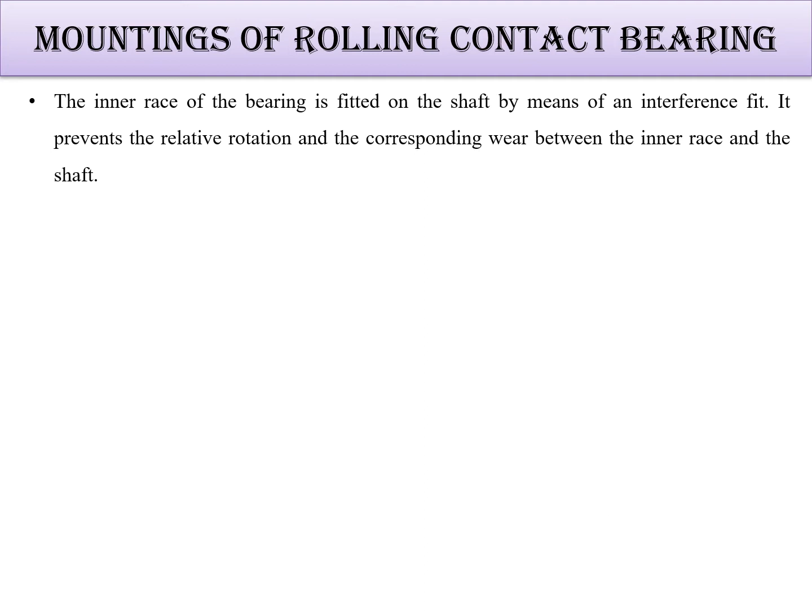So the next topic is the mounting of rolling contact bearings. Let's see the mounting, how to mount the bearing on the shaft. This is also a very important part. The inner race of the bearing is fitted on the shaft by means of an interference fit. Press fit or interference fit is used mostly here.

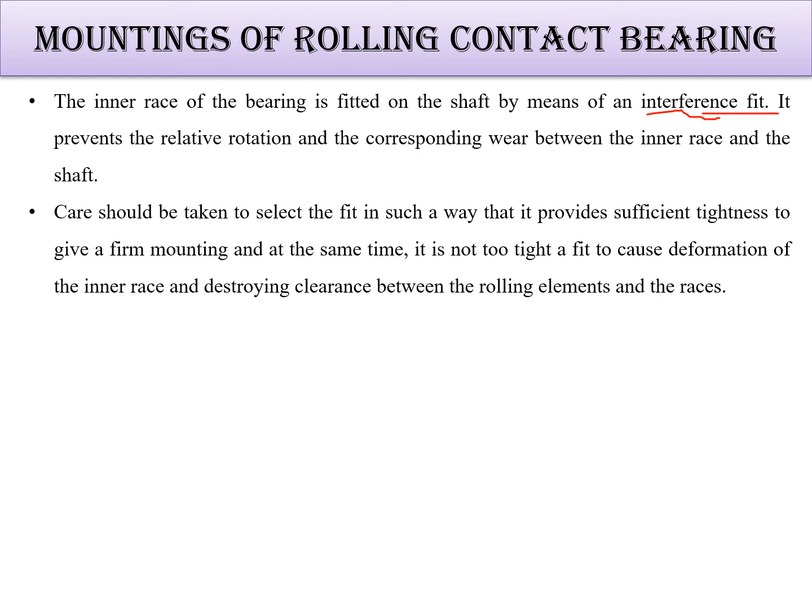It prevents the relative rotation and the corresponding wear between the inner race and the shaft. So care should be taken to select the fit in such a way that it provides sufficient tightness. It should be firm, it should be tight properly. No deformation should be there in the inner race.

The outer race is also mounted on the housing, in general with an interference fit, but with a lesser degree of tightness than that of the inner race.

Insufficient tightness will give you creep, a slow rotation of the outer race relative to its seating. This will not give a proper arrangement and proper working of the bearing. So the fitting should be proper. The outer race is permitted to shift axially to take care of axial deflection of the shaft also.

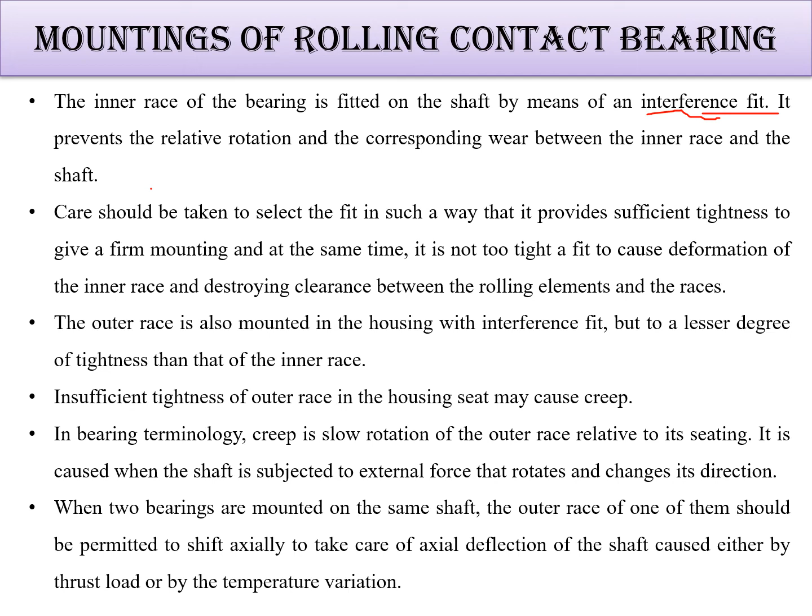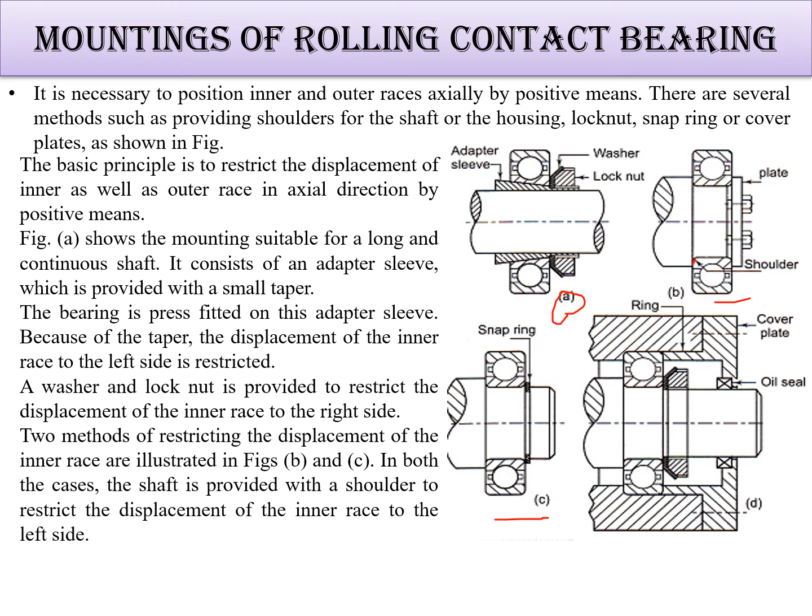Two methods of restricting the displacement of the inner race are illustrated in B and C. This is B and this is C. In both cases the shaft is provided with a shoulder, which restricts the displacement. And in D a shoulder is provided to restrict displacement of the outer race. You can see the lock nut and washers, and these oil seals are provided here. A circular ring of the cover plate restricts the displacement.

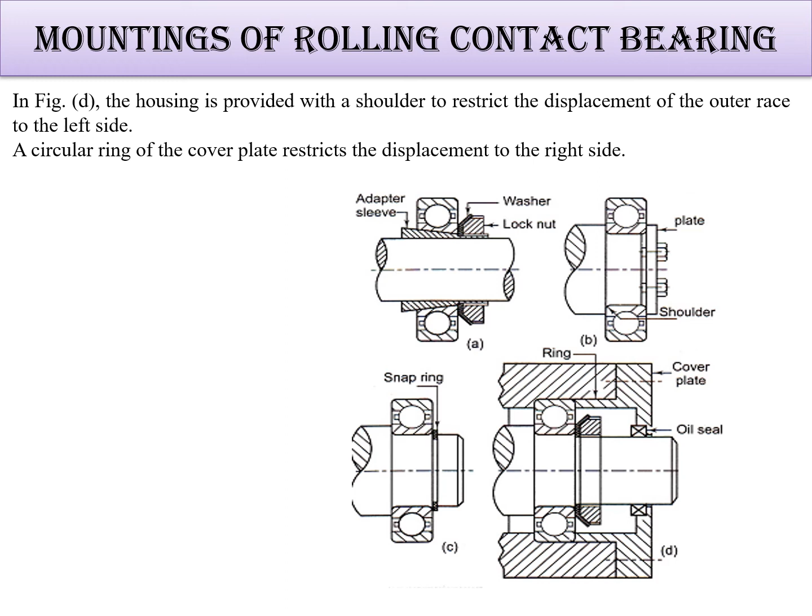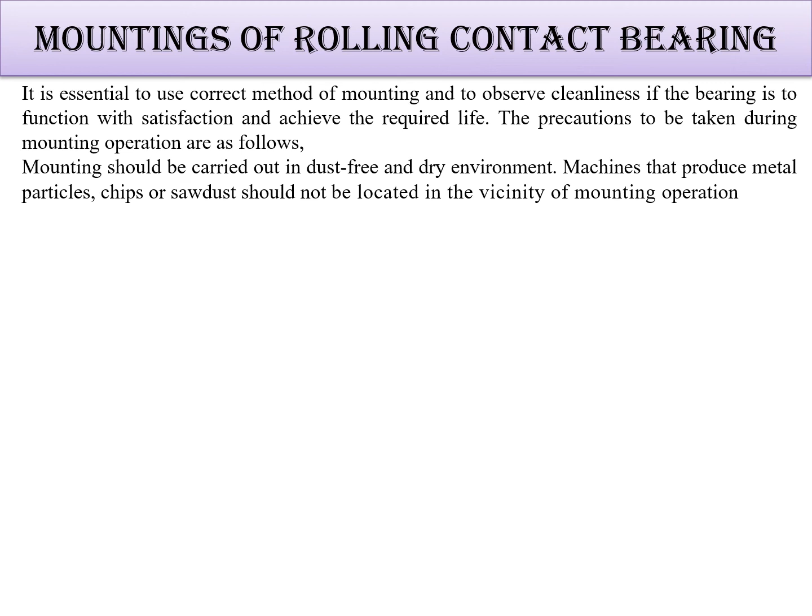It is essential to use the correct method of mounting and to observe cleanliness of the bearing. The mounting should be carried out in a dust-free and dry environment only. Before assembly, the shaft and the housing bore should be inspected; they should not have any dirt. And the bearing should not be taken out of its package until it is assembled.

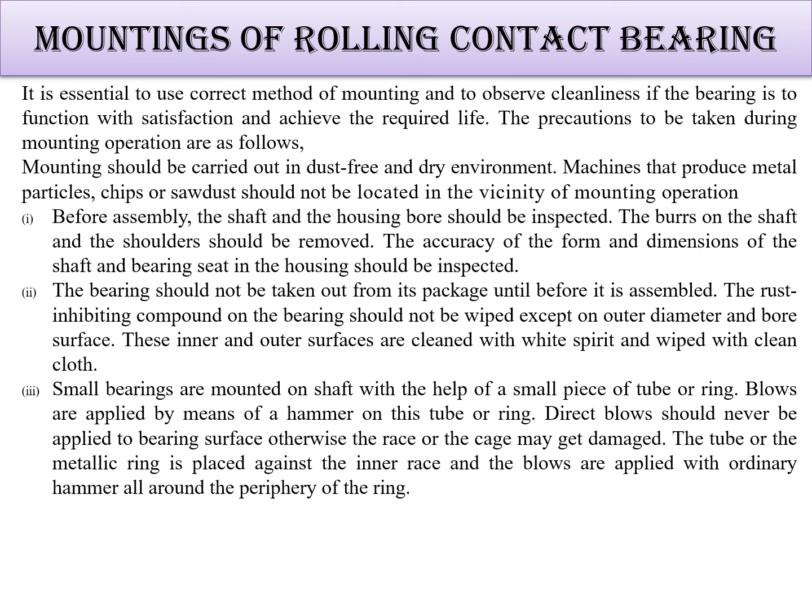Small bearings are mounted on the shaft with the help of a small piece of tube or ring, and medium size bearings are mounted on the shaft by pressing the tube on the metallic ring, or by heating to 80 to 90 degrees Celsius. The bearing should never be heated by direct flame when it is being fitted. So this is how the mounting is done.